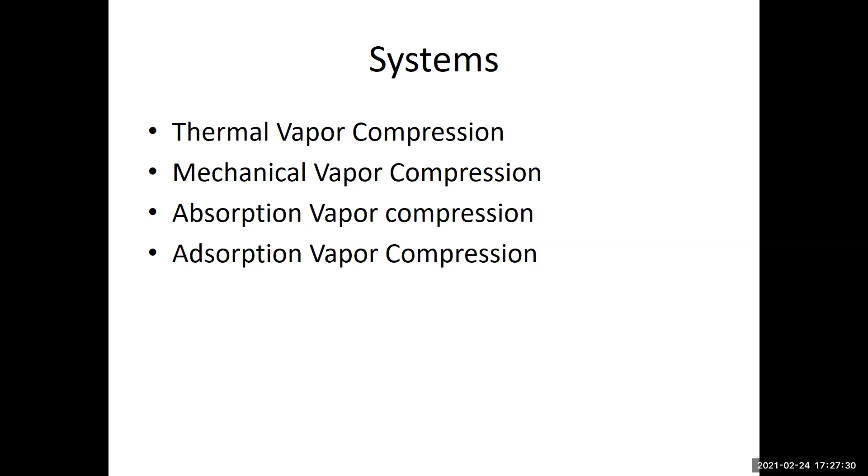So it's the thermal vapor compression that we are going to consider today, and this is the layout. The idea is simple and beautiful, actually, because we could simply reduce the amount of steam that we are getting from the power plant significantly.

I'll just go through the description again. What we see here is the condenser, or we call it the feed preheater. Seawater enters here to the condenser, where it will be heated from the seawater temperature, T cooling water, up to a temperature of TF, feed temperature.

Again, it's still a single effect evaporation unit. The feed is going to be sprayed here over tubes that have steam passing in. The steam is going to condense, giving off its latent heat that will heat that feed into the saturation temperature.

Part of it will evaporate and rise up, whereas the rest is going to be collected at the bottom as brine, and then we are going to reject it, which is again rejected at the saturation temperature of the brine, TB. The vapor which is generated at a temperature TV, and remember TV is less than TB by boiling point elevation, is going to be leaving the unit here, and it will be split.

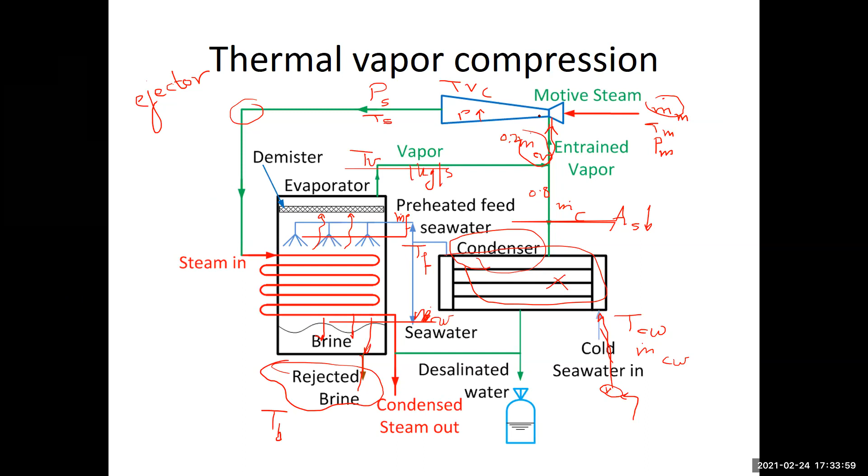For example, 0.8 kilogram per second goes to the condenser, and 0.2 goes to the TVC. The 0.2 that went to the TVC has been mixed with a certain amount of steam, and then this mixture goes to condense in the condenser.

We are going to retain back this 0.2 here, and whatever we got from the power plant will return to the power plant. So the 0.8 is going to add to the 0.2, and we are going to have the 1 kilogram per second again.

So the productivity of the unit has not been affected. What has happened is that we have less steam, and accordingly when I look at the PR, the performance ratio, as m dot distillate over m dot steam, that m dot distillate has not been reduced. It's the same quantity, but the steam quantity has reduced, hence the PR has increased.

Okay doctor, thank you. Right?

Or you can look at it the other way. You can say I'm going to get the same steam I used to bring previously, and then add this quantity to it. Then you are going to get more than 1 kilogram per second of distillate. So you can do it different ways.

What we did was fix m dot distillate, and we found that m dot steam should be less. We could have done the opposite: fixed the quantity of steam, but then m dot distillate is going to increase, because you've basically increased the quantity of steam entering here, as if you increased the Q evaporator, so it evaporates more vapor. So you can look at it from both angles, either fixing productivity and finding the Q is less, or vice versa.

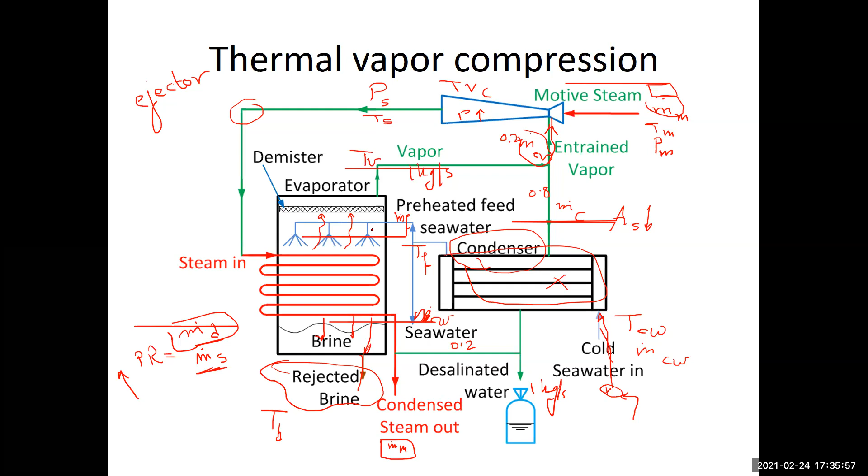Fix the steam, and you'll find that you are going to get more distillate water.

So I've seen the evaporator, I've gone through it last time, I've looked at the classification of evaporators and different types. Currently, the one used is the tube with horizontal bundle of tubes in the evaporator, made up of a tube bundle or heat exchanger, a place for the vapor to rise, distribution sprayers to spray the water, and a mist eliminator to make sure droplets carried out by the vapor are retained back to the brine pool.

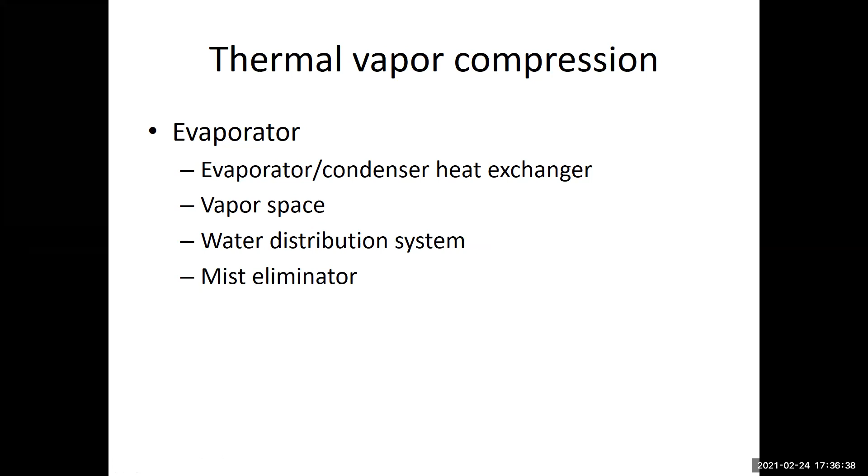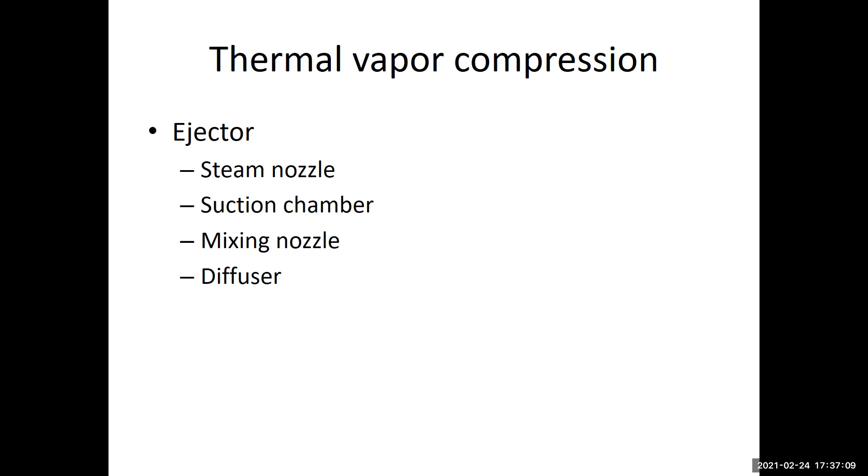The condenser is nothing but a shell and tube heat exchanger. Then the ejector, or thermo-vapor compressor, is made up of a steam nozzle, usually a convergent-divergent nozzle. There is a suction chamber, where the low pressure is created. There's a mixing zone, a throat where we mix the motive and entrained vapor together, and a diffuser where the decrease in velocity and increase of pressure occurs.

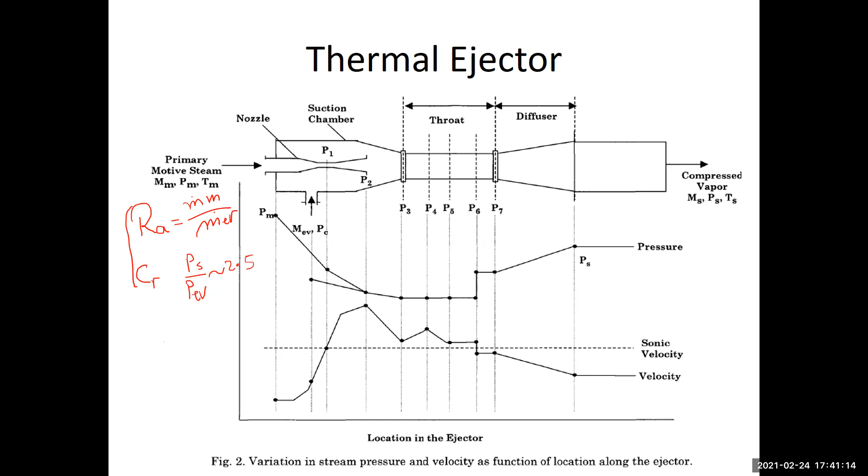These two characteristics of the ejector have a certain practical range for them to operate in, and you should operate it in what they call a critical condition. This is a condition that would guarantee that this unit is going to operate steadily and deliver the required quantity of steam per unit time at the required pressure and temperature.

The third component is the condenser, and we have seen the condenser already. It's a condenser, and sometimes they call it a feed preheater because it does preheat the feed, the seawater, from the cooling water temperature to the feed temperature, which is close to the saturation temperature. So the requirement in terms of additional external energy is less, and this is basically the kind of energy or heat recovery that we have for the unit.

The feed water is chemically treated, which means we are talking about anti-scalant, anti-foaming, and anti-fouling chemicals being added to the water. It's like a dose that should be given to the water before it is admitted to the evaporator. Usually, the vapor temperature is less than the boiling or saturation temperature, the brine saturation temperature, by the boiling point elevation.

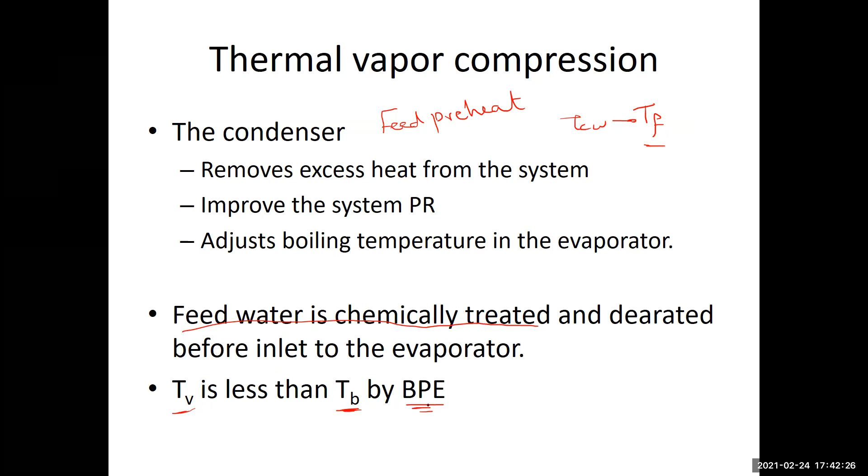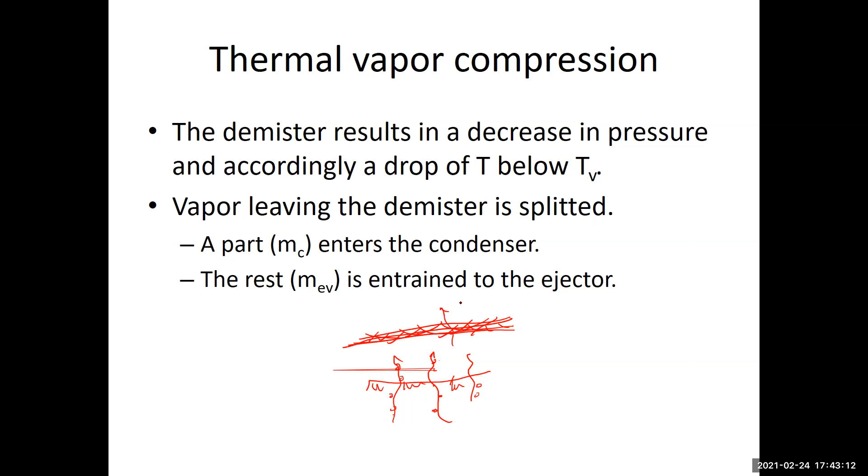We have a demister, and the demister has the function of forbidding the entrained vapor from carrying liquid up. If we have sprayers in the system and there is vapor rising, it might happen that the vapor on its way up can carry some of the tiny droplets, especially since the sprayers are breaking the seawater into small droplets. Some of these droplets can be carried by the vapor, so that's why you have a mist eliminator. It's like a net, like a filter, so that you filter out all the water droplets and only allow the vapor to pass in.

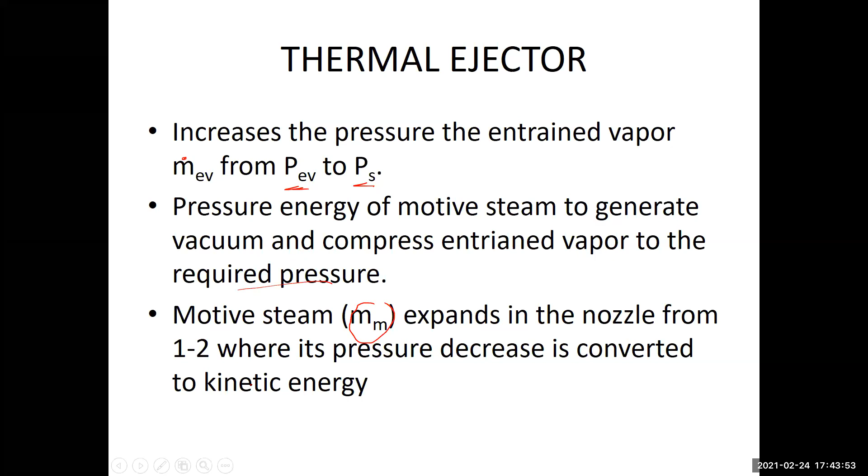The ejector increases the pressure of the entrained vapor, M dot entrained vapor. You compress that from a pressure of P entrained vapor to P steam, using the pressure energy of the motive steam to generate the vacuum and compress the entrained vapor to the required pressure. The motive steam expands in the nozzle, where its pressure reduces, its velocity increases... actually, high kinetic energy is there. Here I'm just repeating again the description of what's happening with the ejector.

The converging-diverging nozzle results in supersonic speed, which means we are talking about reducing the pressure down, and that would be the value of the entrained vapor. So this vapor is going to be entrained to be mixed with the motive steam. Both of them, upon mixing, pass through a Venturi diffuser so that the velocity would decrease and the pressure would increase, reaching PS, which is the delivery pressure of steam leaving the ejector.

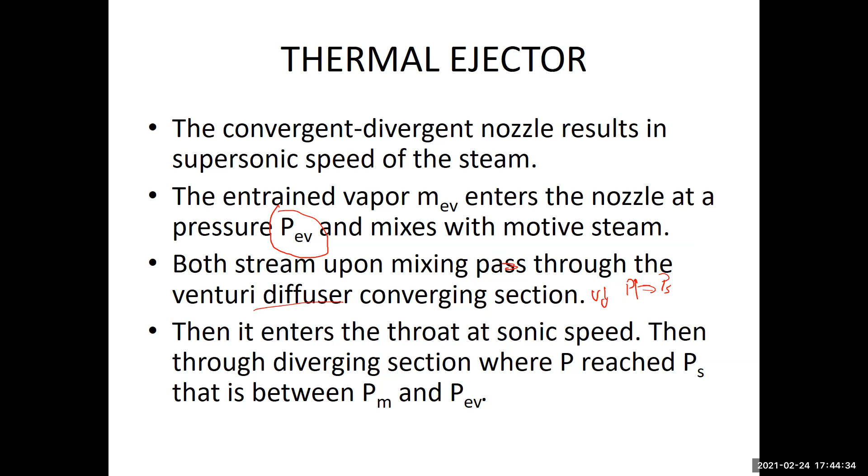For the operation, we try to keep some typical values for best operation of the unit, like stable operation of the ejector. The critical pressure ratio of the suction pressure should equal or exceed 1.81 for the water vapor. The suction pressure would be 0.55 or less of the discharge pressure. The entrainment ratio by definition is m dot motive steam divided by m dot entrained vapor.

By critical pressure ratio I mean compression ratio. I said it's a typical value we use as 2.5. Anyway, this value should be more than 1.81.

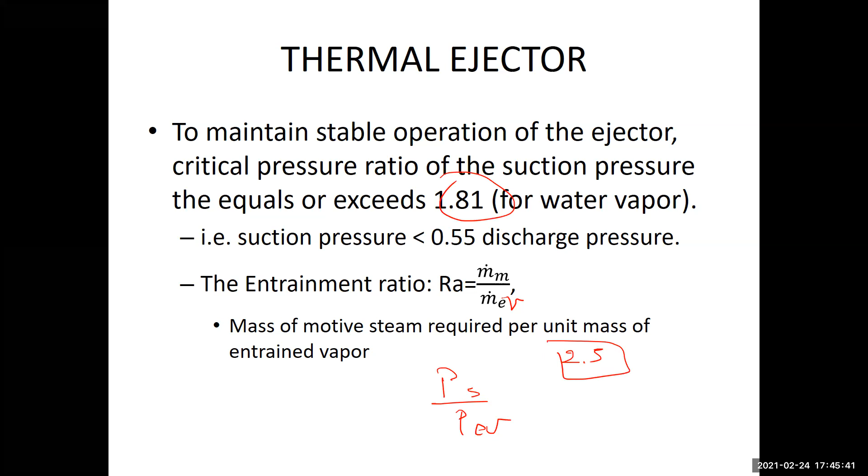Now what we'll be left with is going through the analysis of this system. When we talk about seawater entering the evaporator, the seawater that enters is basically m dot feed. This m dot feed will be divided into m dot vapor, or m dot distillate—both are the same—and m dot brine. So we have written this equation.

Note this equation is going to remain with us for the rest of the single effect, the multi-effect, the single stage, and the multi-stage flash. So we're going to keep on with this. If you go back and refer to the book on the blackboard, you'll find that going through chapters 2, 3, 4, 5, 6, this equation will always be there.

Chapter 2 is what we covered last time, the single effect evaporation. Chapter 3 is what we are working on now, the single effect evaporation with vapor compression. Chapter 4 is the multi-effect evaporation. Chapter 5 is the multi-effect evaporation with vapor compression. Chapter 6 is the multi-stage desalination. So for all of them, this equation and this one definitely are going to be always used.

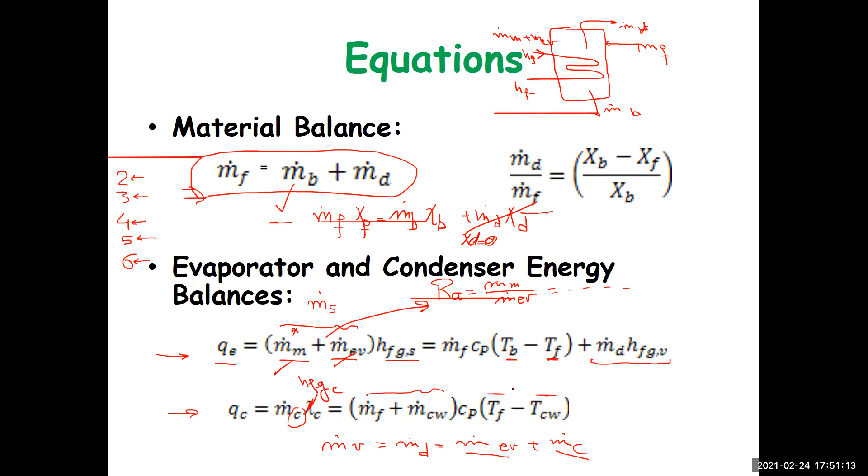For the areas, we're going to consider what we talked about last time. For the evaporator, we're going to have T steam constant, and we're going to consider TB. So it's just a temperature difference here. So Q is U evaporator, area of the evaporator, into the temperature difference. Once you know the value of U, we have already calculated Q from the previous slide, which is basically the feed being heated to TB and part of it has evaporated.

When it comes to the condenser, we are talking about a condition where the temperature of the vapor is constant, but the feed is going to be heated from T cooling water to T feed. So we need to calculate a log mean temperature difference, which is this. And Q condenser is going to be U of the condenser, area of the condenser, into the log mean temperature difference in the condenser, and you can get this, typically similar to what we have done last time.

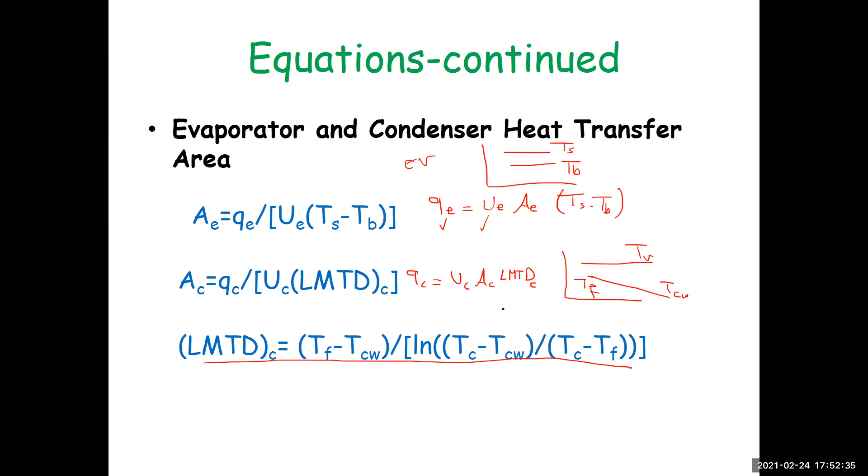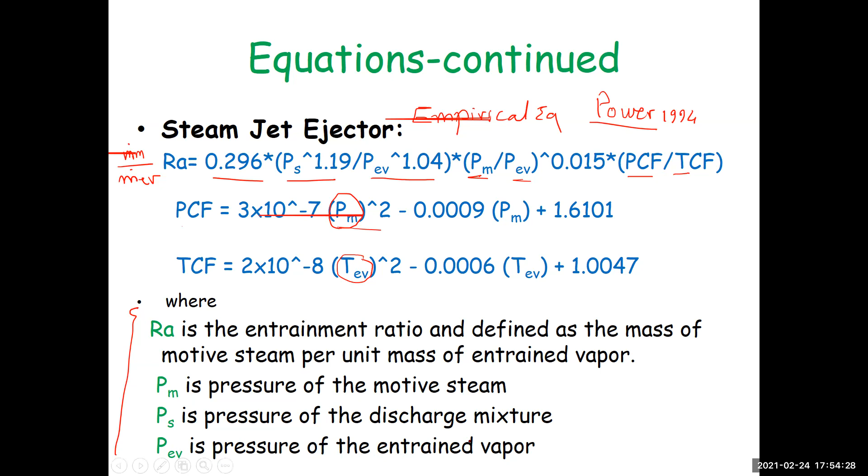What we did after that is basically the model. We have combined all of these components and put it into the EES to look at the results. We resolved the equation that we took last time, the same model, but what we did this time is add the TVC with a compression ratio of 2.5, as you can see here.

Again, the value of m dot feed is 2.5. The m dot distillate is 1 kilogram per second, which is this. We did the analysis, and took the motive steam pressure as 750 kilopascal, the entrained vapor pressure as 37 kilopascal, and the discharge pressure as 92.5 kilopascal.

This is the pressure correction factor calculated, and the PR of that unit turns out to be 1.48. When we did the analysis last time, we had a PR of 0.97. Now you can see how much the performance ratio increased just by adding these components.

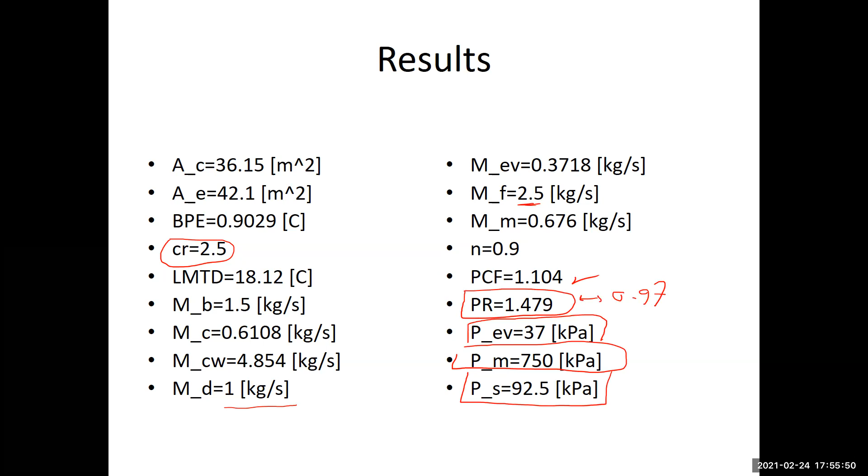The rest of the data are given here. This is the value of the entrainment ratio, 1.818. The specific heat transfer area is smaller because we are using a smaller condenser now. And this is the temperature correction factor, along with the typical temperatures given to operate the unit.

We can see that the work of the compressor is not included in these equations. There's no work, because this is not a mechanical compressor. This is a thermocompressor, a thermovapor compressor, which does not have moving parts. It is basically something which looks like this.

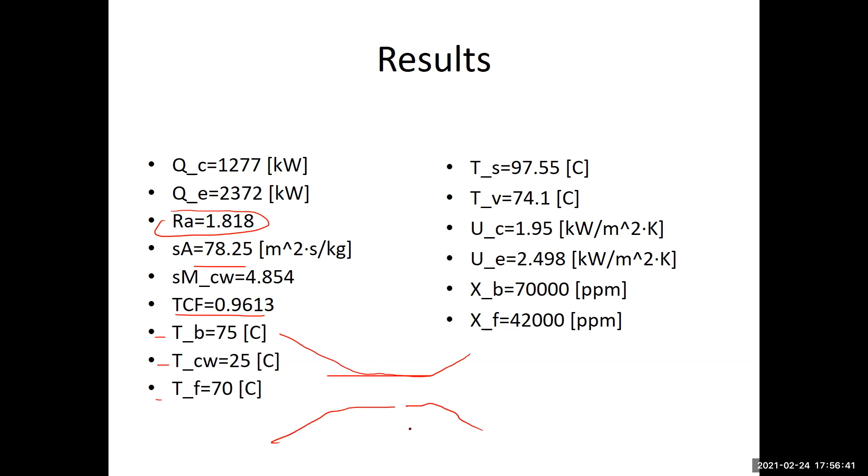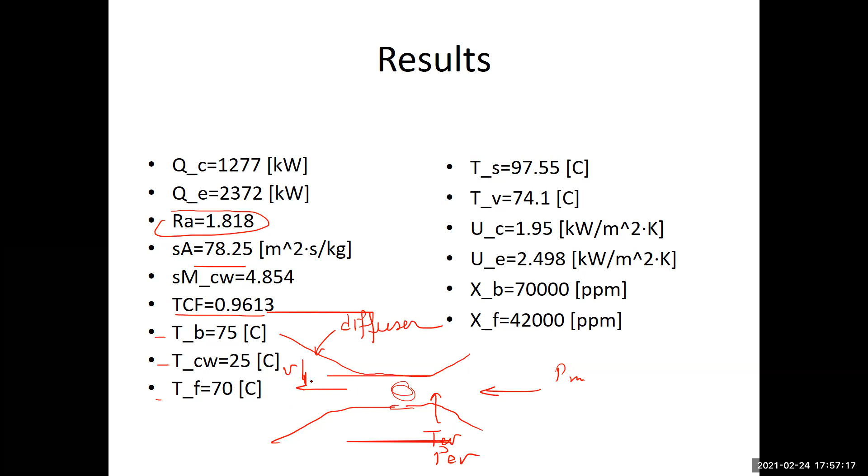This opening is where you are entraining. This is basically the motive steam, and it is entraining the vapor here. They are mixed together, and the pressure increase here is due to this part of the diffuser. So it's not a compression due to a motion of a shaft, but a compression due to going through an increased area, where the velocity reduces and the pressure keeps increasing. So it is not a mechanical vapor compressor, it's a thermal vapor compressor.

Let's consider an example here, so we can go together through the process of the calculations, or at least put things together. So we're talking about a single effect evaporation system with thermal vapor compression. And the data that we have...

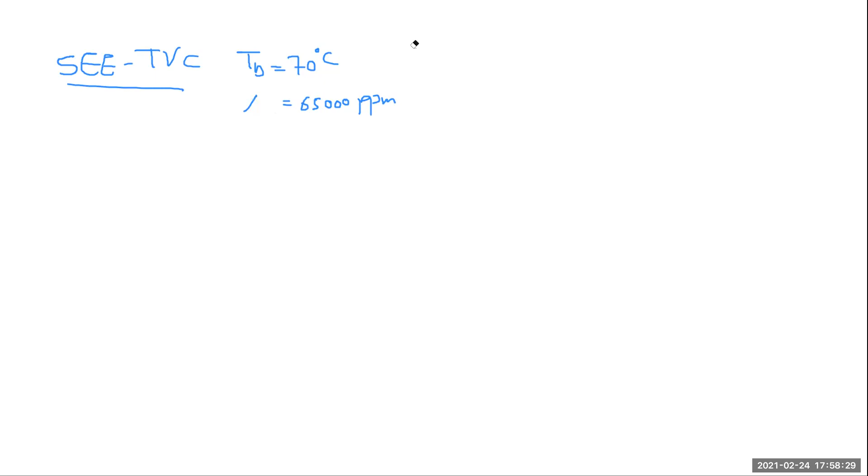Brine saturation temperature of 70 degrees centigrade. This is not a feed salinity, this is the rejected brine salinity, XB, at 65,000 ppm. XF, the feed salinity, is 45,000 ppm. The cooling water is coming at 25 degrees centigrade.

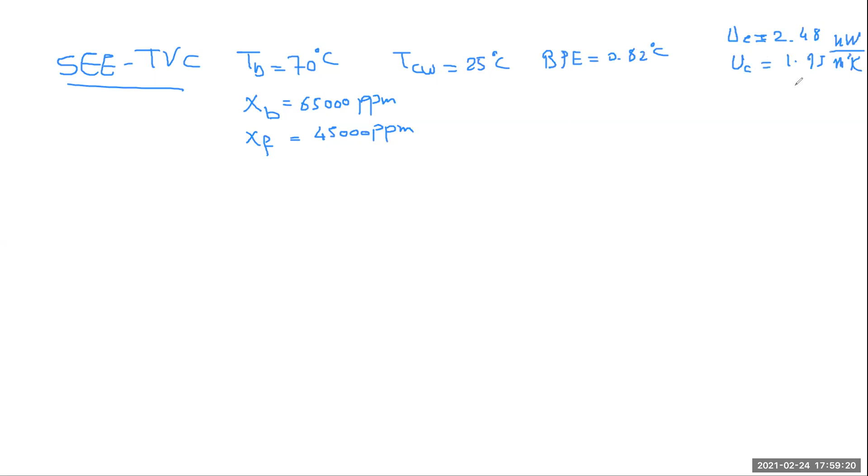And we have the boiling point elevation of 0.82 centigrade. The overall heat transfer coefficient in the evaporator and the condenser are basically 2.48 and 1.95 kilowatt per meter square Kelvin. The CP of the seawater is 3.88 kilojoule per kilogram Kelvin.

The compression ratio is 2.5. The motive steam pressure is 750 kilopascal, and the entrained vapor pressure is 37 kilopascal. And yes, HFG of the vapor is 2355 kilojoule per kilogram.

Did I miss anything here? Yes, it could have provided us with one of two things. For example, we say we are going to do that for an m dot distillate of 1 kilogram per second, so we operate per unit mass flow rate. Or instead of providing m dot distillate, we can provide a feed flow rate, and this is decided to be 25 kilogram per second.

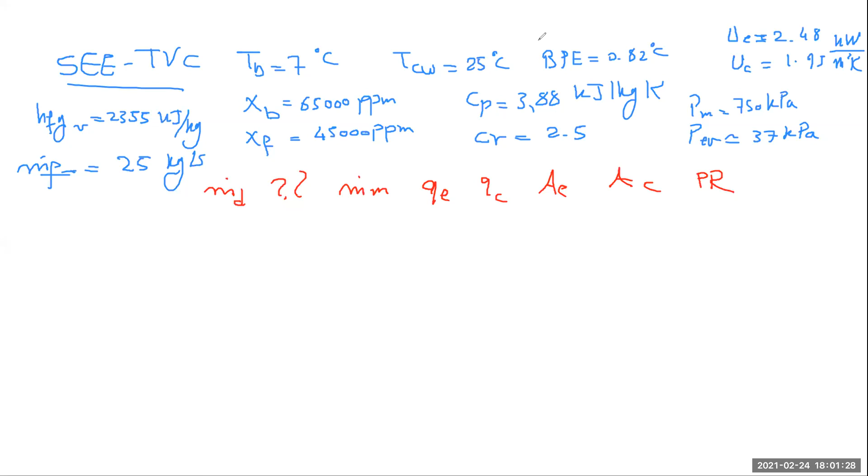Let's look at the main elements that we would need to see in the solution of this problem.

We're going to start as usual. M dot feed is equal to m dot distillate plus m dot rejected brine. We don't know the distillate, but we know the feed, it's 25 kilogram per second. And m dot feed times x feed is equal to m dot brine times x brine. We know m dot feed, we know x brine, and we know x feed. So from here, we can get the value of m dot brine, and substitute back to get the value of m dot distillate. So this, to begin with, is the mass balance that we need for this system.

One second thing we may consider is that TV is basically temperature of B minus boiling point elevation. So this value can be calculated. TB is already given here, as 70 degrees centigrade. So the value of TV can be obtained.

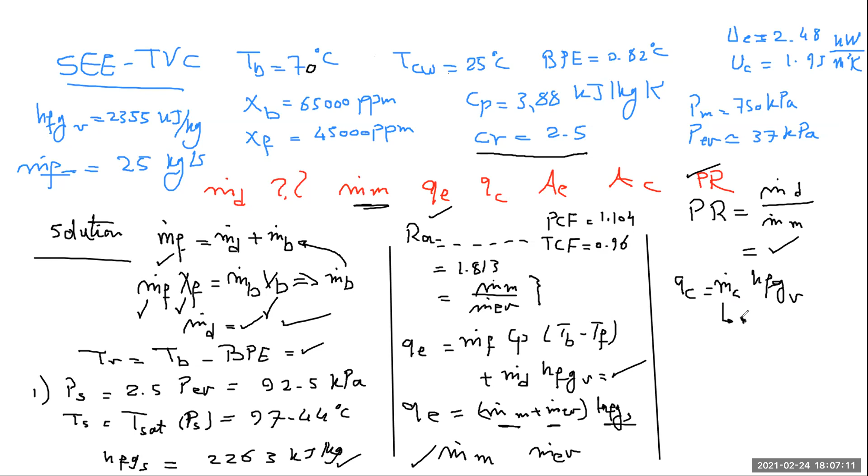Why is it not true? Who can tell me why? Due to entrained vapors, because they have moved to the TVC. Exactly, because some of the vapor has left to the TVC. So what's going on here is not M dot distillate, it's M dot C. And M dot C here is nothing but M dot distillate, or M dot vapor, minus M dot entrained vapor. This is the mass flow rate which is going to go to the condenser, and we can calculate it. So QC can be obtained here.

And accordingly, we can calculate the area, but for the area, we need the log mean temperature difference. So we'll just make a quick sketch here. This is the temperature of entrained vapor, or temperature of the vapor in general. And this is basically T cooling water, and here TF. This is delta T1, this is delta T2, so I can calculate the log mean temperature difference.

QC is nothing but the overall heat transfer coefficient into the area into the log mean temperature difference, and from here we can calculate the area of the condenser.

Then what is left is only the area of the evaporator that needs to be calculated, which we can do here. Again, simply Q evaporator is the overall heat transfer coefficient in the evaporator into the area of the evaporator into the temperature difference Ts minus Tb. This is known, this is known, this is known.

So from here, we calculate the area of the evaporator. This is all that we need here, this is what has been needed in this example. But we can take it one more step further by saying that in the condenser, we have already calculated Q condenser, and that Q condenser was calculated before here as M dot condensate into HFG of the vapor.

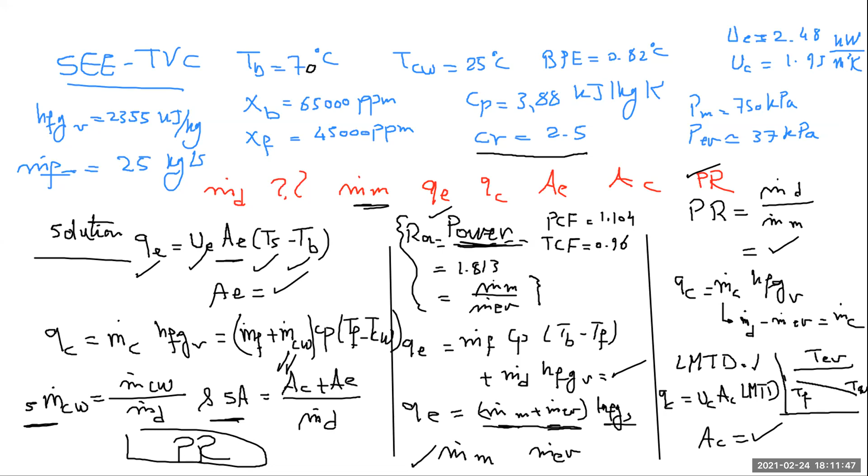Okay, in case there are no questions, we can move into another kind of compression associated with single effect evaporation, which is the case of mechanical vapor compression. For this one, I'm going to share this file on a single effect mechanical vapor compression system. This is the system we'll be looking at now. The difference here is that it's not a thermal compressor, but a mechanical compressor.

There's something unique here—because it's mechanical, we do not need a boiler. We're talking about a desalination system run by a compressor, and the compressor needs shaft work. That shaft work can be provided by a diesel engine. So this is a standalone unit; you don't have to link it to a power plant, you don't need a boiler. All you need is to take it, put it anywhere, feed it seawater or whatever quality of water, and it will produce.

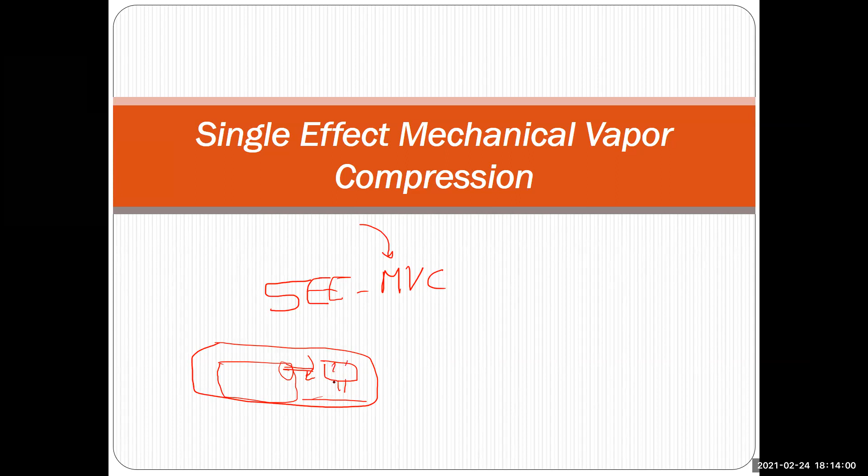And it's not only that—lately you may think, well, you don't need a diesel engine. Why not take the power from PV panels so the unit can operate based on renewable energy? It would work fine then. The only drawback with this type of desalination system is that the power requirements are on the high side, and you need a substantial amount of power to operate.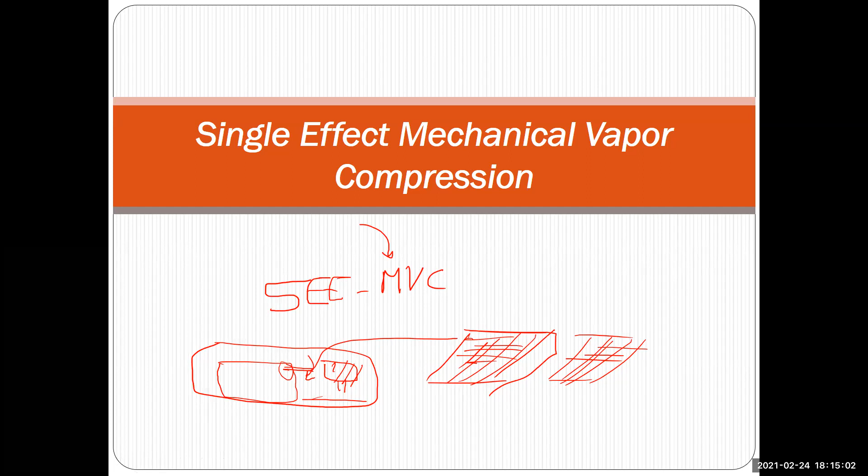If you find a way to reduce the power, you're going to have a real competitive performance for this system. We've done some work on it—we even had a patent filed and published in 2019, considering one way to do thermodynamic balancing to reduce the total power needed to operate such systems. I'll talk about that a bit later when we get to the MED system.

So it's an attractive system among various single-stage desalination systems. Why? Because it's compact, confined, and doesn't require an external heating source. It's not like the thermal TVC, which needs steam from a power plant. It's not like absorption, where you need a whole absorption system using lithium bromide, lithium chloride, or calcium chloride, with an absorber and regenerator. It's not like adsorption units, which need a desorber and adsorber. All you need is a way to run a compressor to compress the vapor. That's all.

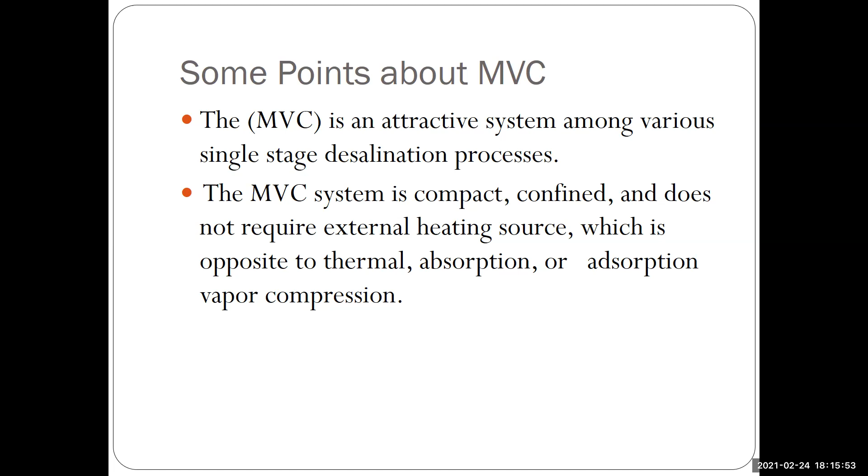The major components of this system include a mechanical vapor compressor, an evaporator, a couple of heat exchangers, pumps, and a venting system to get rid of non-condensable gases. One interesting feature is that from part 1 to part 5, there's no condenser—and that's true, we don't need a condenser for this unit. But we do need a couple of heat exchangers. Are they mandatory? Not really, but they're there for energy recovery, to enhance the performance of the system.

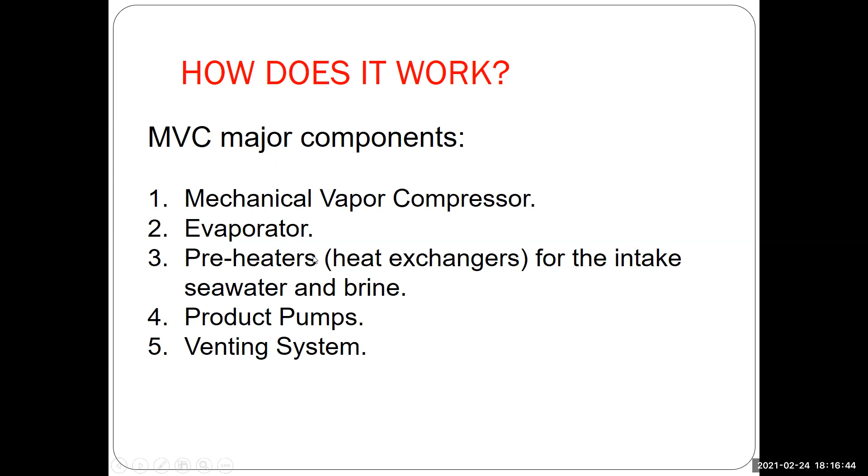This is the system layout. On the right-hand side are a couple of sensible heat exchangers, used only to increase the temperature of the cooling water from T cooling water to TF. There is liquid entering here and here, and this is seawater being split. So there's no vapor to condense, and there's no condenser here.

Let's follow that. What's happening? Basically, seawater is taken from the sea, and it's only feed. There's no M dot cooling water here, there's no need. We used to have M dot cooling water whenever we had steam, to make sure all the steam would condense. We don't have steam here, so we're only going to have a certain M dot feed.

That's all. Even the M dot feed is going to be split. Part of it will go here, and part will go here, where it will be heated from T cooling water up to T feed. The feed here is chemically treated, deaerated, and sprayed in the evaporator the regular way we have seen, over tubes that have steam inside.

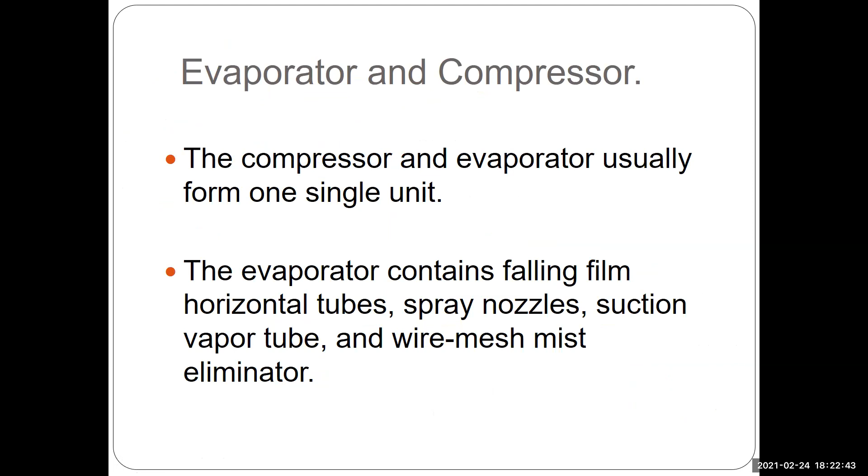These are some special requirements for operation of the unit. The temperature difference between the steam and the distillate should be 4 to 10 degrees centigrade, which is the degree of superheat in the compressor. The difference between the feed and the saturation condition is 1 to 5 degrees centigrade, as we've done in the previous couple of systems where it was 5. Remember, T feed was 70 and T saturation was 75, so a temperature difference of 5 for sensible heating only. The difference between T distillate and TB is again somewhere between 1 to 5 degrees centigrade.

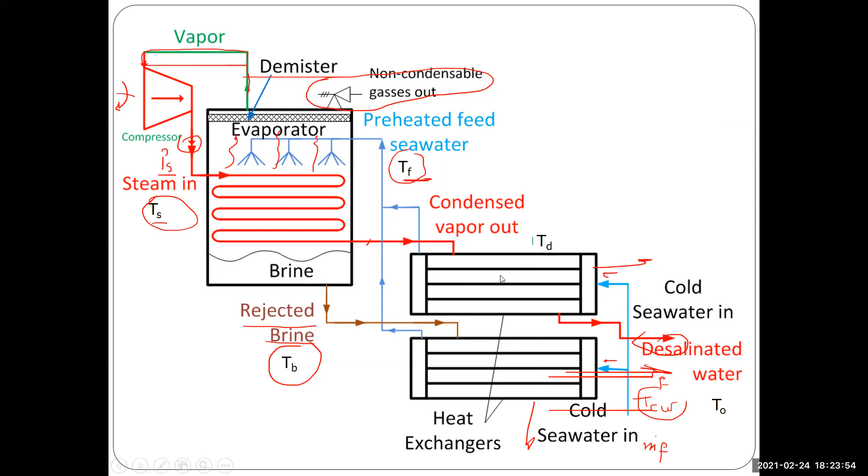The difference between T0 and T cooling water: T cooling water is the temperature of the seawater. It will cool down from TD to T0, and the other stream cools down from TB to, let's say, also T0. This is the rejected fluid temperature from the two heat exchangers, so we can keep the heat exchanger size small. It's recommended to have the temperature difference of 1 to 5 for the fluid being cooled in the heat exchanger.

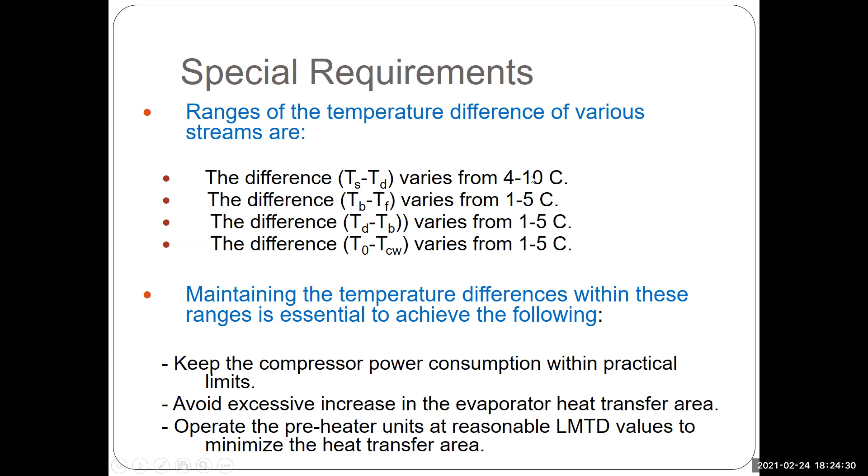Maintaining these temperature differences keeps the compressor power in an acceptable range. We will also have the evaporator heat transfer area not be too large, and we'll have moderate values for the overall heat transfer and the log mean temperature difference needed in the heat exchangers we have here, the two heat exchangers and the evaporator.

Material balance, as usual: we have an evaporator where m dot feed comes in, and it splits into m dot vapor leaving at the top and rejected brine leaving at the bottom. So m dot feed equals m dot distillate plus m dot brine. Also, m dot feed times x feed equals m dot brine times x brine. These two equations are enough to calculate m dot feed and m dot brine, provided the salinity of the feed, the brine, and the distillate quantity are given. So there are basically 2 equations and 5 unknowns; 3 of them should be known so that it becomes 2 equations and 2 unknowns, and you get these values.

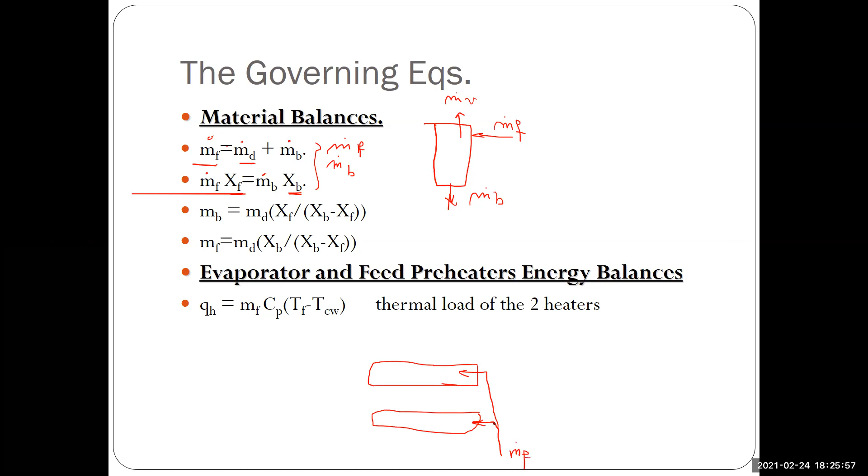Then we have a couple of heat exchangers. In one, part of the seawater comes in, and in another, the rest of the seawater comes in. This is m dot feed; part of it goes here at temperature T cooling water, and the two streams leave and combine as m dot feed at temperature T feed. If you consider these two units together as a control volume, Q of both heaters equals m dot feed times Cp of the feed times (T feed minus T cooling water). This is the balance for the two heaters together as a control volume; you need to look at each one separately.

Then we take one of them, for example the distillate preheater. M dot distillate enters at T distillate and leaves at T0, and this is a fraction of m dot feed, let's call it alpha times m dot feed. So the balance becomes: Q of the distillate preheater equals m dot distillate times Cp times (T distillate minus T0), and this equals alpha times m dot feed times Cp times (Tf minus T cooling water).

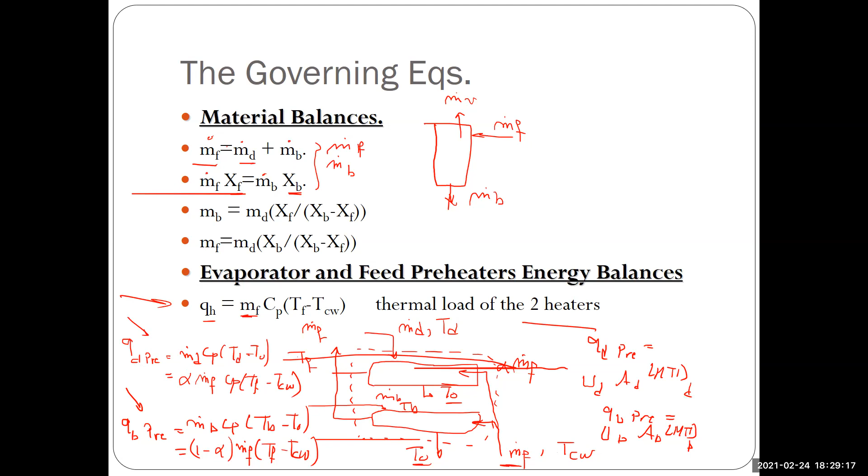The first part on the top here, you don't have to pay much attention to. Here he's looking at Q for the two heat exchangers together. We have seen this expression. This is the energy given by the distillate flow rate. This is the energy given by the brine flow rate. Each one is in its own heat exchanger. Why is he doing this here? Because he's looking forward to get a closed form expression for the T naught.

Do we have to do that? No. And again, I don't like to have sort of closed form solutions where we have to memorize this equation. There's no point of doing that. Let's do the analysis one by one, and then we'll get everything detailed in terms of the answers that we are getting for the expressions.

So we have seen now, coming to the evaporator. The evaporator, a couple of things are occurring there.

We have superheated vapor here, which is entering, which is leaving the compressor. So we have basically m dot distillate, which is going to enter here into these tubes, where it is superheated. Why superheated? Because we don't want condensation to start occurring outside. So you give a little degree of superheat for the vapor, which is leaving the compressor, so that the condensation does not occur. You make sure that what enters here is going to be slightly superheated, so that you make use of all of the latent heat which is going to form here.

So you are going to enter here as sort of superheated vapor. So there is a degree of desuperheat. There is a reduction in the temperature of the superheat here. So QE, when you look at it from... it's just this thing happened.

I'm going to load it again so that we look at this expression. We were here. We're talking about the distillate as it enters into the evaporator. It enters slightly superheated, and then its energy is going to be as follows. I'm talking about the evaporator.

And steam which is coming here as superheated, first it will be desuperheating. So it's going to cool down sensibly so that a sensible cooling of the vapor is going to occur here, which is taken care of by this expression: m dot distillate, Cp of the vapor, it's coming as a vapor, Ts, and it will cool down to a temperature Td. Remember, it will enter here as Ts, it will cool down to Td, after which it is going to condense, and then it will leave as liquid. It will leave as liquid at a temperature Td. Td is the saturation temperature. Ts is a slight superheat.

So first, a desuperheating is occurring here. After that, condensation is going to occur. So it will first reduce in temperature to the saturation condition, after which it's going to condense, giving off the latent heat to the sprayed seawater, and then leaving at a temperature Td. So this equation is the equation of the energy given by the superheated vapor which leaves the compressor.

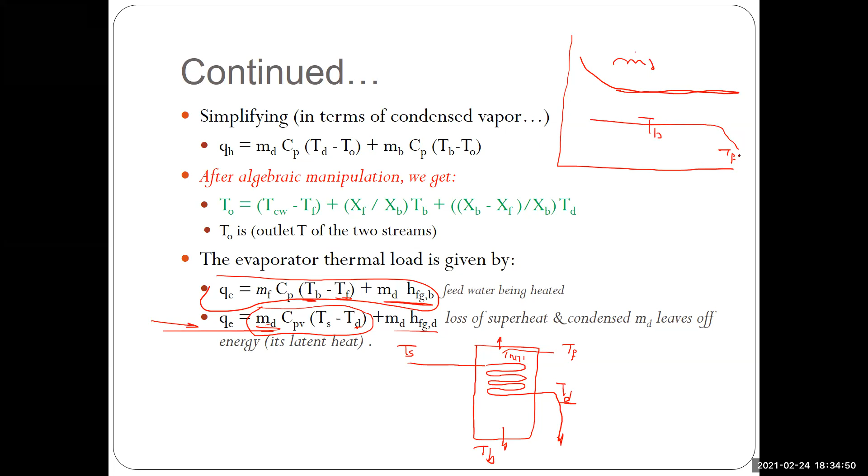Now you may remember the typical temperature ranges given earlier, looking at what would be a typical temperature difference between T feed and TB, what's typical between TS and TD, and what's typical between TD and TB, so that you can keep the sizes in an acceptable range.

And that tells us something. Whenever we are looking for the areas needed for the unit, will it be a good approximation to neglect the desuperheating or the subcooling or sensible heating here, and consider only the part of constant temperature, or do we have to account for these? That's a thing we need to look at.

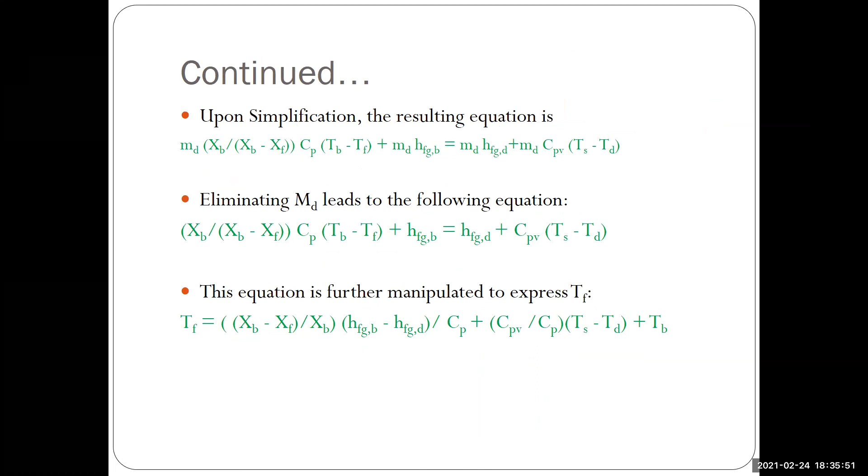These are additional equations, simplifications and simplifications and simplifications. I don't prefer doing that because you don't need them while analyzing a system or solving a problem. The basic equations of the energy balance are the ones that we rely on.

What we see here in front of us is that I assumed the desuperheating is too small to be considered. The sensible heating is too small to be considered, and the substantial amount of energy is spent in the constant temperature heat transfer part. So when we calculated the area of the evaporator, you can see U, the overall heat transfer coefficient in the evaporator, times the area of the evaporator, times TD minus TB. Overall heat transfer coefficient, area, TD minus TB. Both of them should be the same, by the way, or approximately the same.

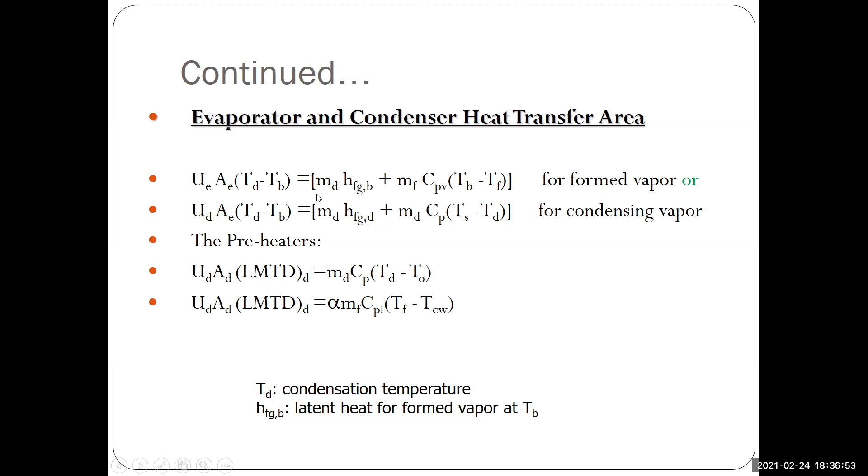They'll never be exactly the same because of that issue of temperature differences and how much of the sensible part you are neglecting. But anyway, this is a first-hand approximation: you say I'm going to neglect the effect of sensible heating or heat transfer associated with sensible heating. Is it a big deal? Not really. You can just calculate a log mean temperature difference for this part and add it. That will be more accurate, and it's not much additional work.

The same thing applies here. Maybe I can put this as an exercise in the next homework, where you can see what happens if we include this and include that. Will it be tedious in terms of analysis? No. Will it affect the results? Yes, it would, and that would be interesting to look at.

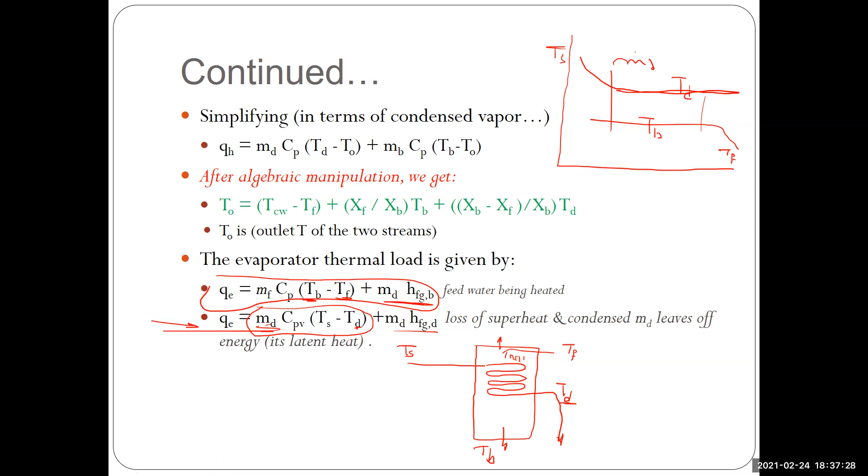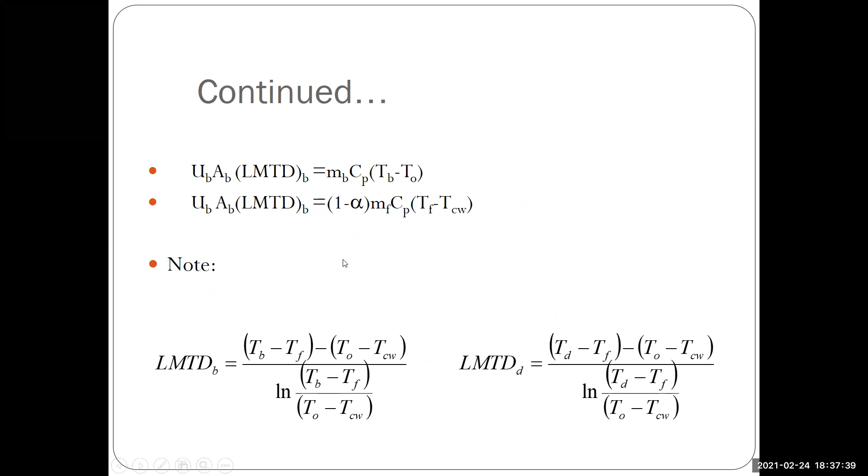And this is how to calculate the log mean temperature difference in the feed preheaters, which basically means the distillate preheater and the brine preheater. The only equation left for us, which I will close with, is this one, which calculates the mechanical power needed for the compressor.